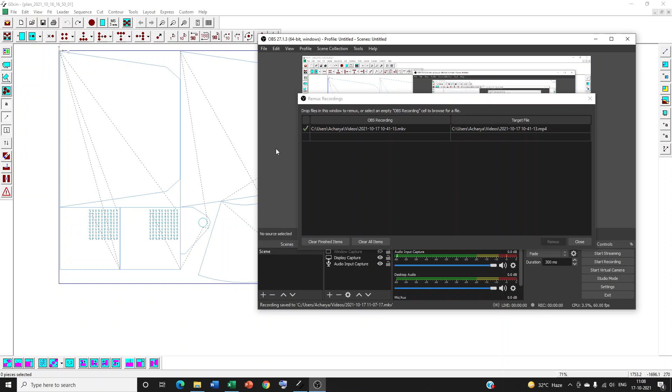Namaste. Let us find out how to attach lead in and lead out manually to all the pieces in a nested layout.

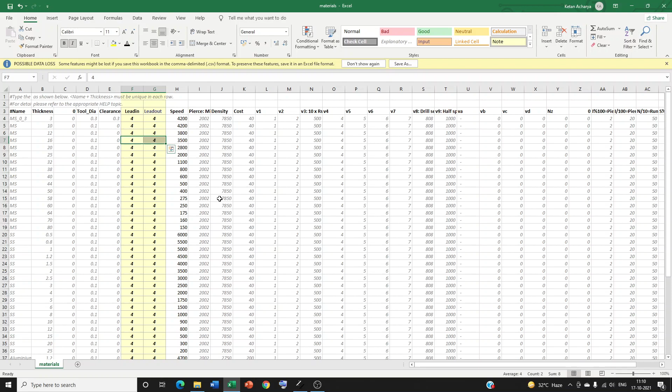The length of the lead in and lead out should be at least twice of the tool diameter specified in column C in materials file. You can add your own material grade and thickness along with the necessary cutting parameters. Description of material file is available elsewhere among the other documentations. Now let's go back to the main software.

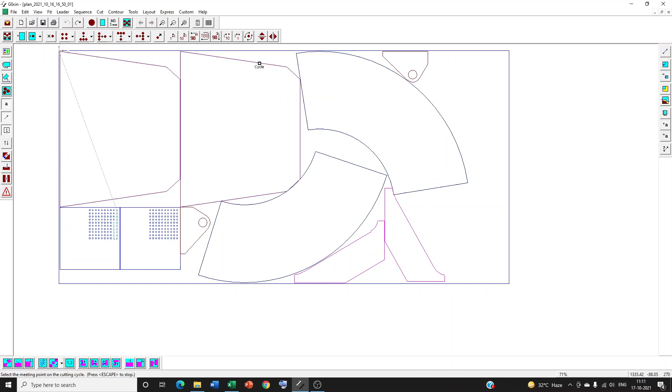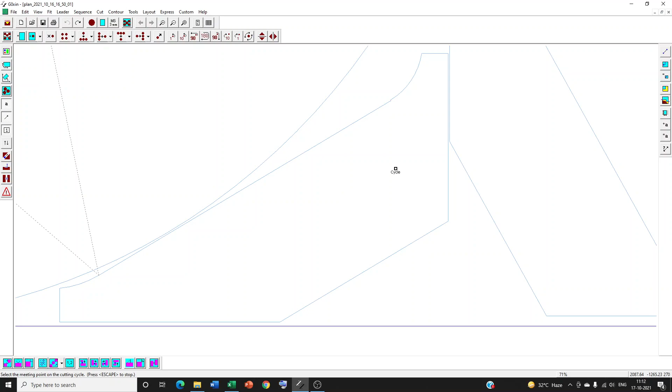So in order to snap the point in point selection mode, click the right mouse button, enable it, click on the end point and now click on this point.

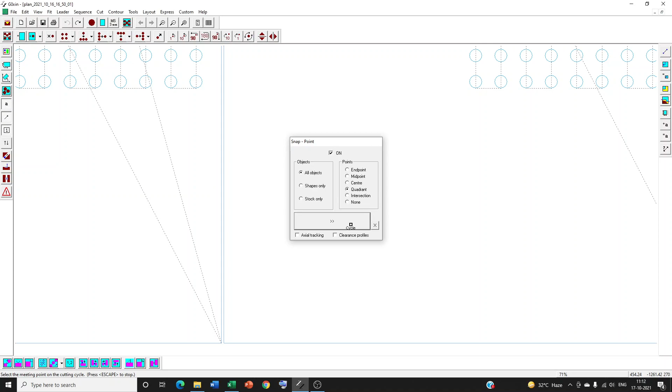Now I want to attach lead in lead out on the quadrant point of a circle. Right click, put it on, but click quadrant over here. Now I want to click on this quadrant point, click, lead in lead out आ गए. I am going to press the escape key to stop this command.

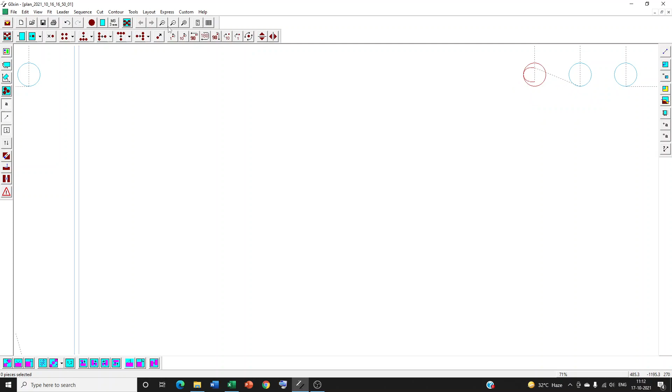So first what I will do is I'll zoom in, I'll go to this hole.

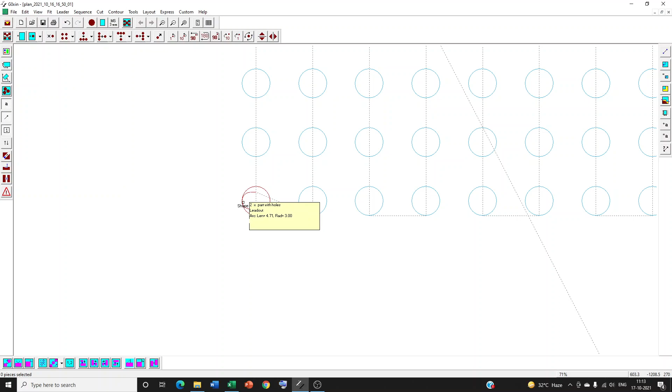And I'll say yes. Please note, lead in and lead out have been copied on all the holes of similar size in the entire layout.

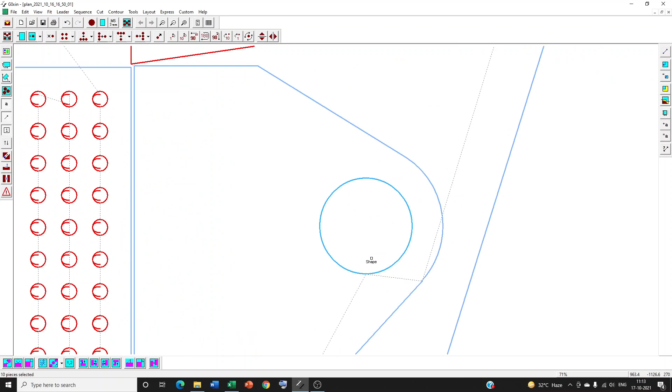But they have not been copied on this big circle because the diameter is different. However, be careful when you repeat the lead in and lead out in this manner, because when you repeat it all over the sheet, sometimes you may touch the lead in and lead out to a neighboring part.

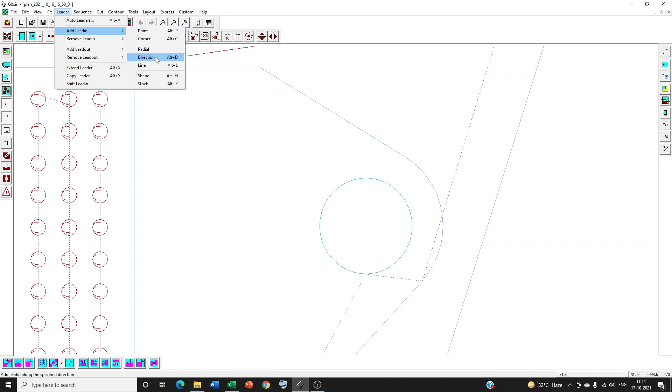You can define lead in lead out the way you wish. More comprehensive menu is available over here. There are several options. You can add lead in to a point at a corner. You can define radial lead in. But right now, let us concentrate and learn about these three options: direction, line, and stock. Let's take them up one by one.

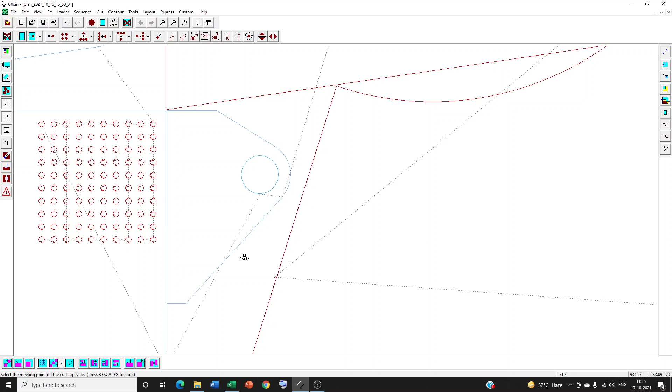Suppose I want to define lead in and lead out along a specified direction. Okay, go here. I'll say add lead in along a direction. I will click here. That is my common point. And then I'll click somewhere over here. Remember, I'm clicking far away from the contact point. But the lead in is taken closer. Why? Because it takes only the direction in this case. Length is taken from the default value.

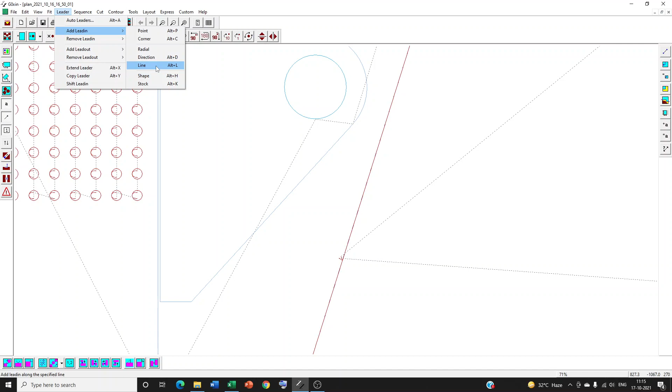Lekin agar aap length bhi change karna chahte ho, then you should use this option, where it will take length as well as direction from you. Suppose I say I want to add lead in over here and I click all the way here. Now I am clicking and you will see it's a long lead in.

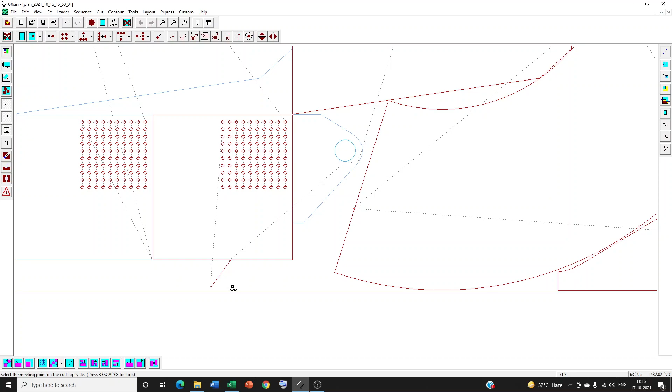The software has taken the length of the lead in as well as direction from the point you clicked on. So this is the difference between drawing a lead in along a direction and drawing a lead in along a line. Finally, sometimes you may want to optimize the cost associated with piercing.

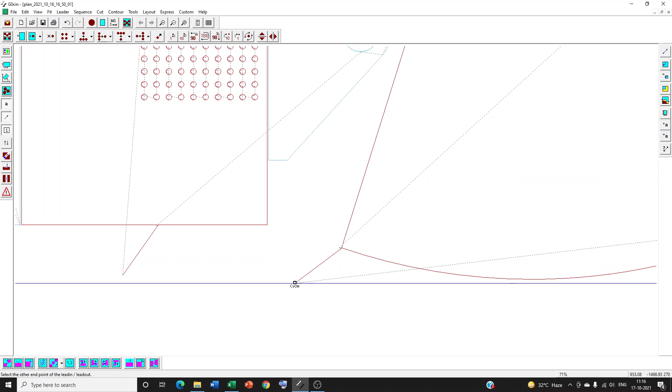So, us case mein you may want to take the lead in from the edge of the raw material sheet. Now, there is a very specific option available here. You will click on that. I want to take it from the end point of this piece. So, yahan par click kar raha hoon. And then I am clicking on the raw material sheet. The lead in is taken such that the piercing takes place on the edge of the sheet. And there is a similar option. Let me press the escape key to break the command.

There is a very similar option to take lead in from the edge of a part which is cut before. But yahan par dhyan rakhna hai ki this part should be handled before cutting the given cutting cycle for which you are adding lead in lead out. Make sure that part which serves as the start point for the lead in is cut before. This is necessary. Raw material stock ke liye ye option sochne ki zaroorat nahin hai. Raw material is never cut and you can take the lead in from the edge of the raw material sheet if you want to reduce the piercing load.

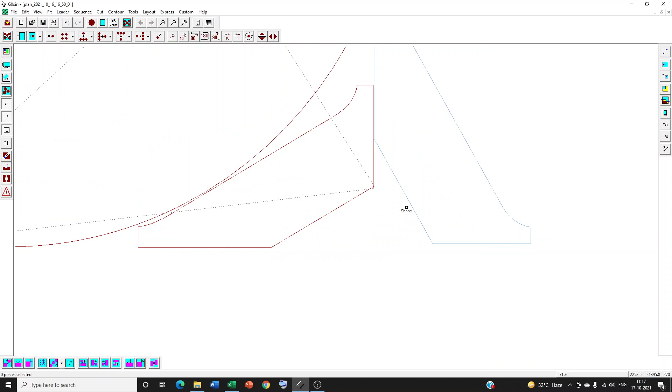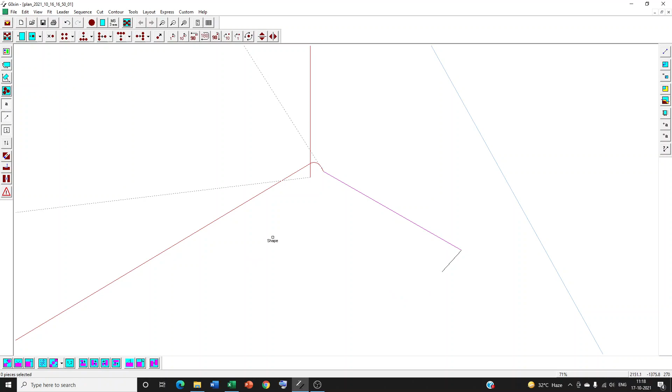There are some specific requirements which come up in certain cases. For example, you may want to stretch the lead in lead out. You may want to extend it. If you want to do so, select the corresponding command, say yes for extending the lead in. And I am extending the lead in here. Pressing the escape key. Lead in lamba ho gaya. Similarly, you can extend the lead out. Just use the appropriate option once you click on this command. Say no in this case. I'm not going to do it, but if you wish, you can use this command as well for extending the lead out.

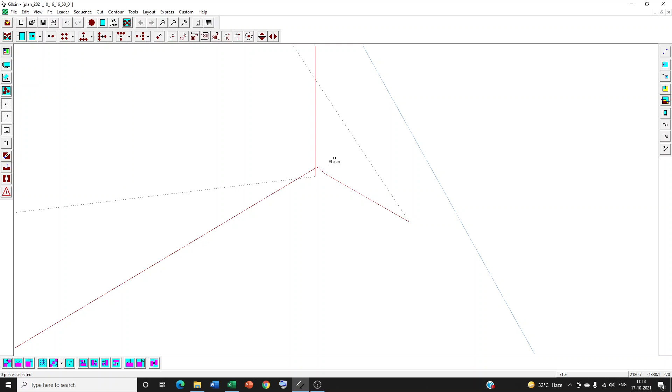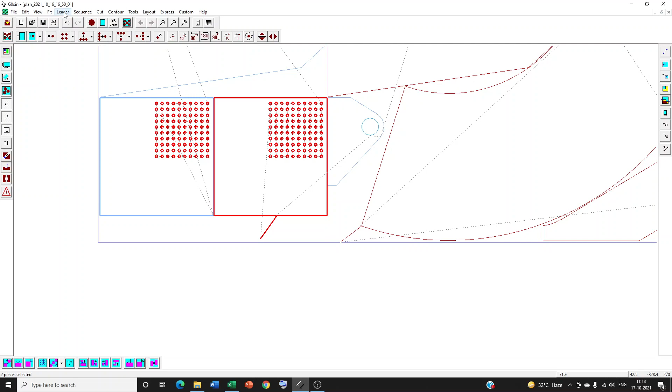Finally, let me show you how to delete lead in and lead out. See, there are two options available. One is to remove lead in and lead out from all the pre-selected pieces. Yahan par maine do pieces ko select kiye hain, highlight kiye gaye hain. And I want to remove lead in, lead out from all cutting cycles, holes as well as outer boundary. For that, go to remove lead in and choose the first one, automatic. Yes and yes. Sab blue ho gaye, outer aur inner dono boundary mein se lead in, lead out chale gaye.

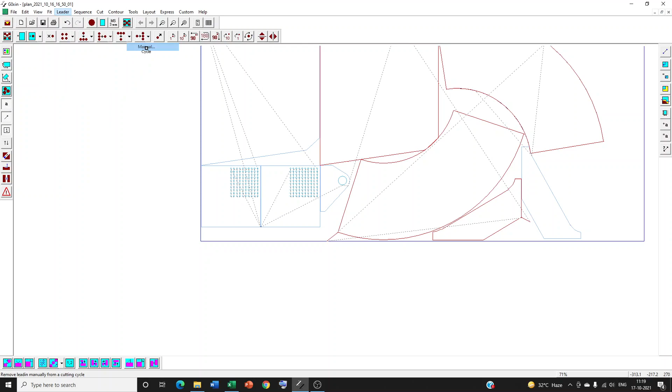But suppose you want to remove lead in from a specific cutting cycle. In that case, go here, say manual, click on the common contact point here. Jo pasand kiya tha vo lead in, lead out ko nikaal diya gaya. Press the escape key as usual to break the command.